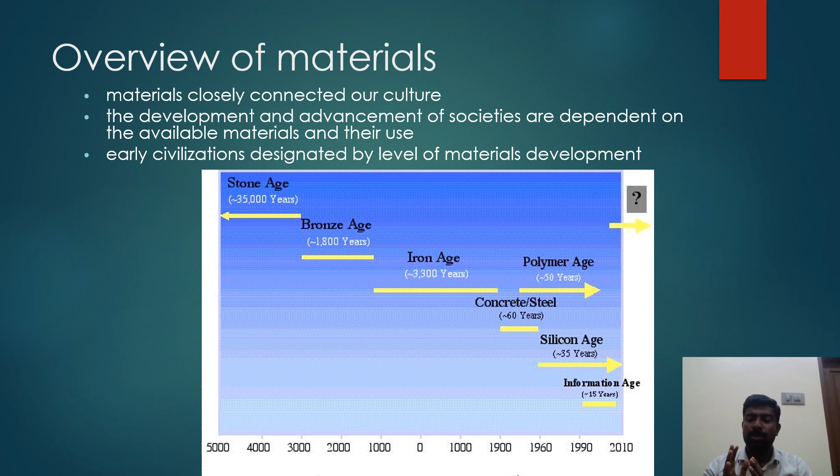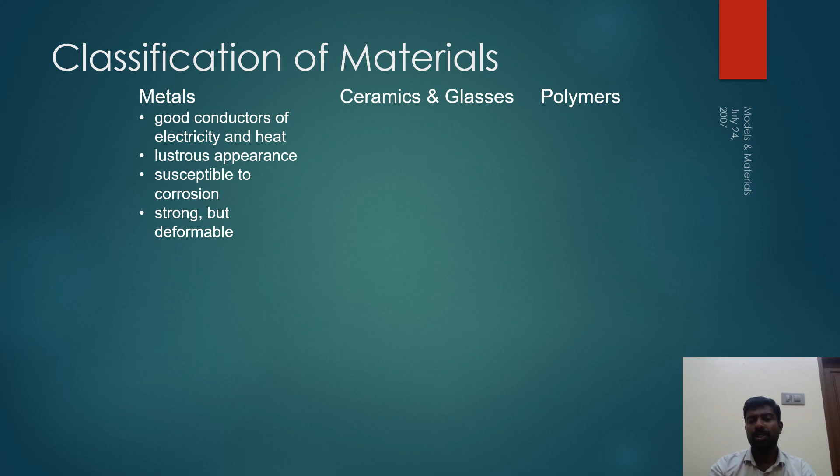Next, we are going to see how these materials are classified. First, we're going to see about the metals. Metals are good conductors of electricity and heat, and they're susceptible to corrosion, strong but deformable.

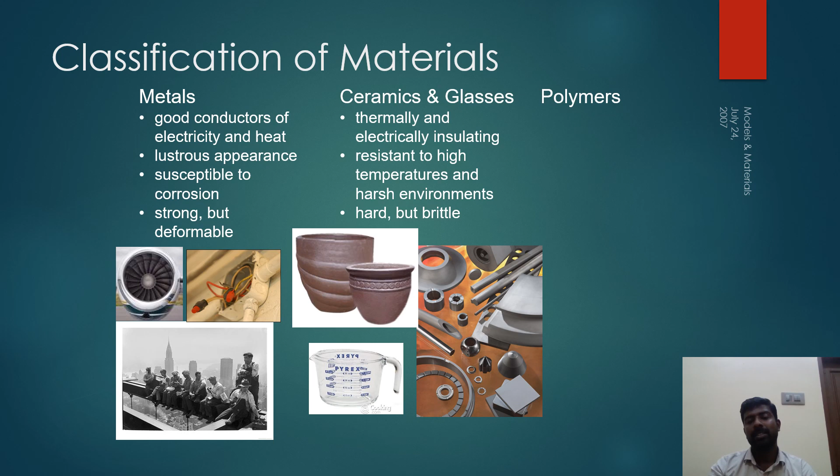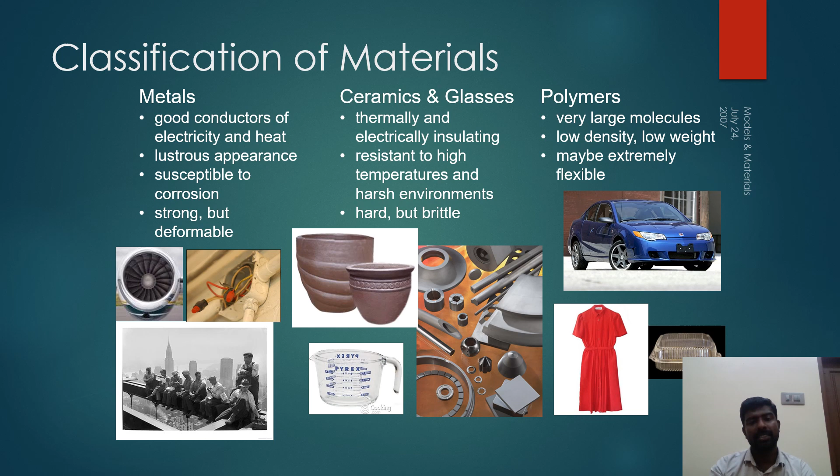And ceramics and glasses. The ceramics and glasses are thermally and electrically insulating, resistant to high temperatures, hard but brittle. And polymers, very large molecules, have a low density and low weight, and may be extremely flexible. So here are given some of the examples of metals, ceramics and glasses, and polymers.

And a few additional categories which come under this classification of materials are biomaterials, semiconductors, and composites. These biomaterials can be implanted in the human body, compatible with the body tissues, whereas the semiconductors have electrical properties between conductors and insulators. Electrical properties can be precisely controlled in the semiconductors.

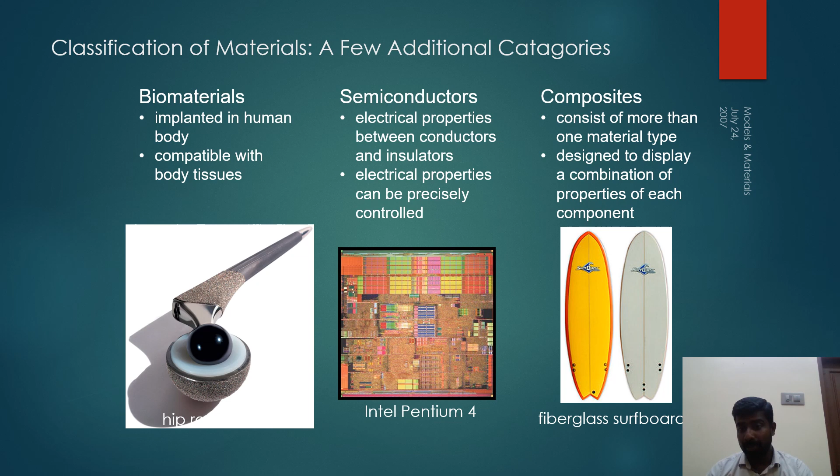The composites consist of more than one type of material, designed to display a combination of properties of each component. And it is very important why the study of materials is important. The student should know why, as a mechanical engineer, we are going to study materials. What is the need for studying materials?

Dear students, an engineer must know how to select a material because you want to design, you want to produce, you want to check the quality of any material, and for all these things he should know what the material is, what type of material we can select, how we have to select. So this is very important for an engineer.

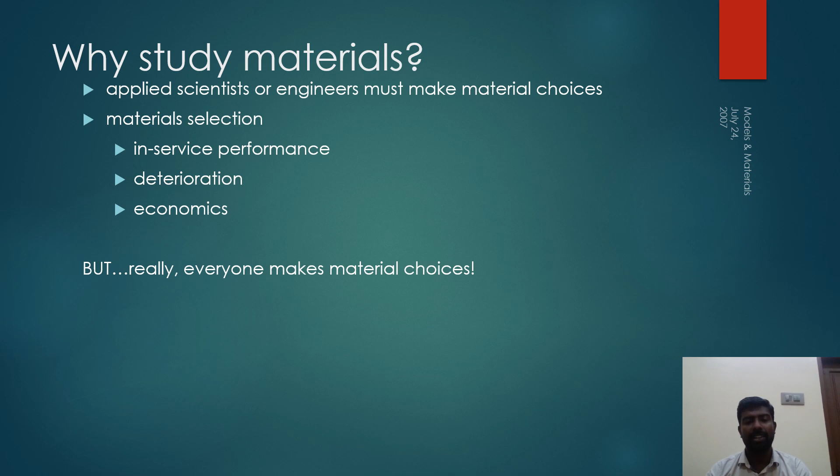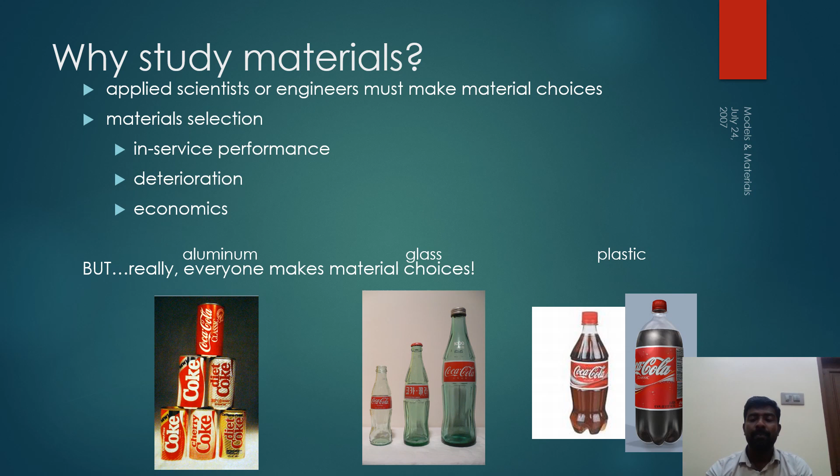A product can be made in a tin or a glass bottle or a plastic bottle, and the choice is based on the application, based on the place where we are using it, based on the climate. So all these factors have to be considered while selecting a material. So the study of materials is very much important for a mechanical engineer.

Why? What for a mechanical engineer? Because if you want to work in the automobile field, you should know all these things for selection, even if it is in a design field or a production field or a quality field. The knowledge about materials helps you select the appropriate material for the particular usage or application. So, my dear students, this is a very important topic in testing of materials: the materials, types of materials, the classification of materials, and the application of materials.